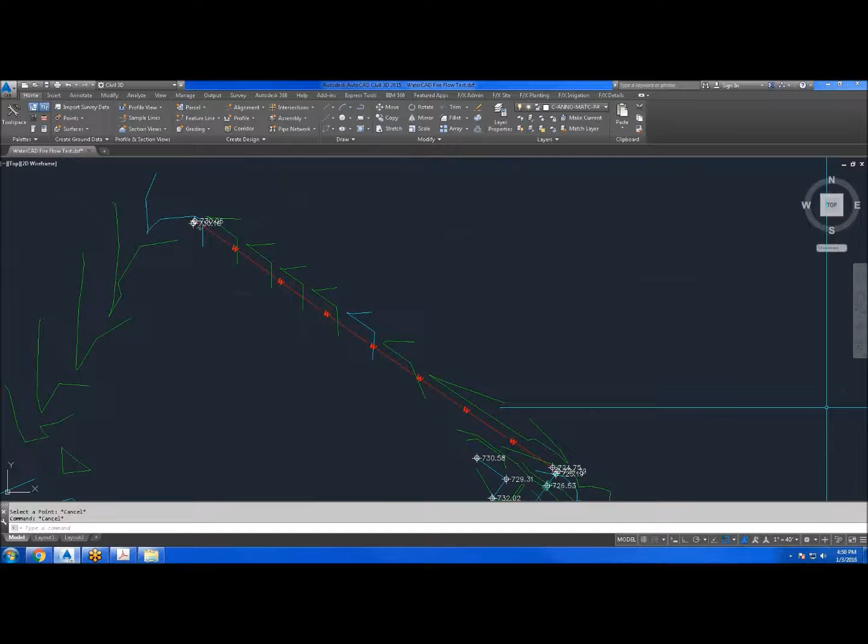Hey everyone, so today we're going to be performing a fire flow test by making a model in WaterCAD.

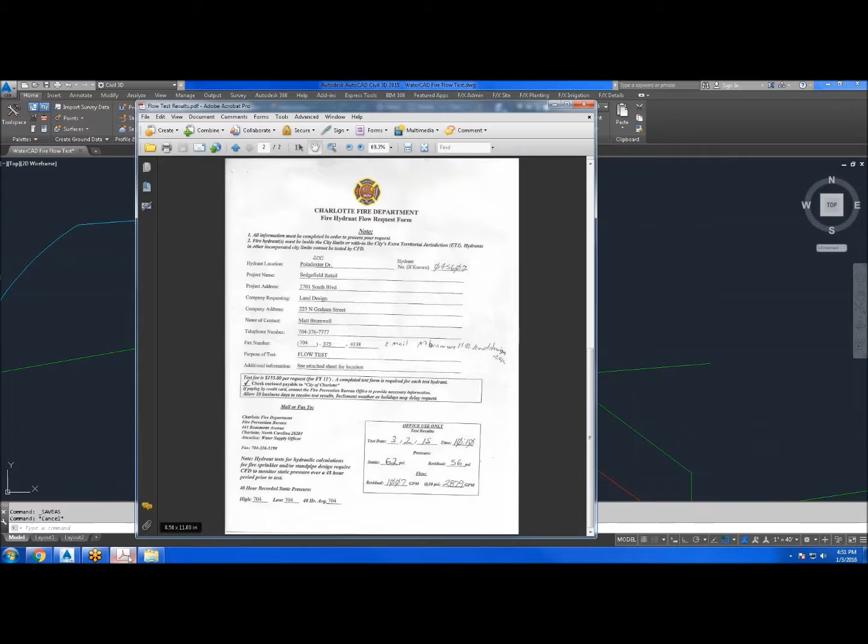So first things first, we have a site here that has a Harris Teeter right in this space. And then we also have a fire hydrant located right here where a flow test was performed, which we have the form pulled up right here. And then we have an existing 6-inch CIP line going into our site with an 8-inch PVC fire line. And this is a backflow preventer, which we'll touch on once we get into WaterCAD about how to model that properly.

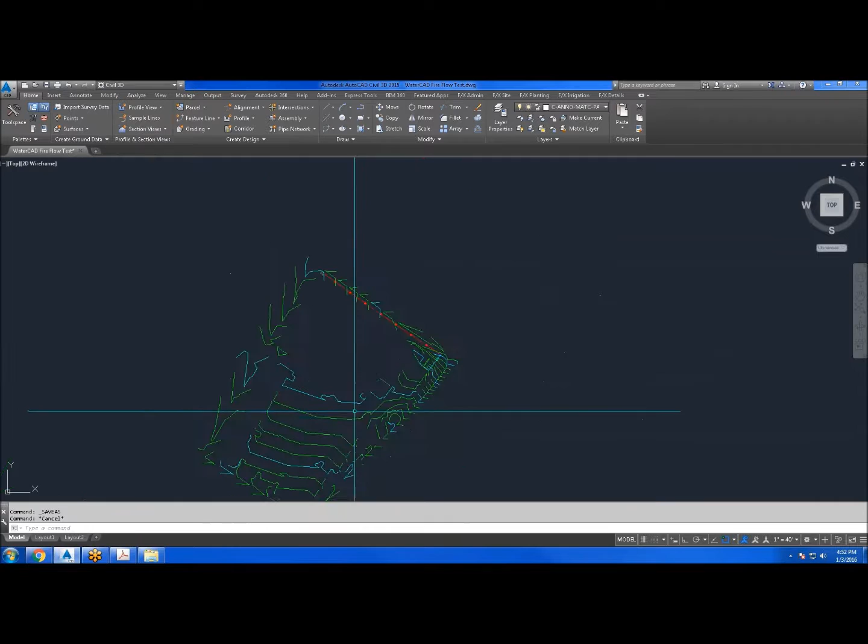So you want to bring in a couple of things to kind of clean it up before you import this into WaterCAD. So what I've narrowed down is the finished grade contours, the fire line with the fittings, the backflow location, your fire hydrant, and your existing water line.

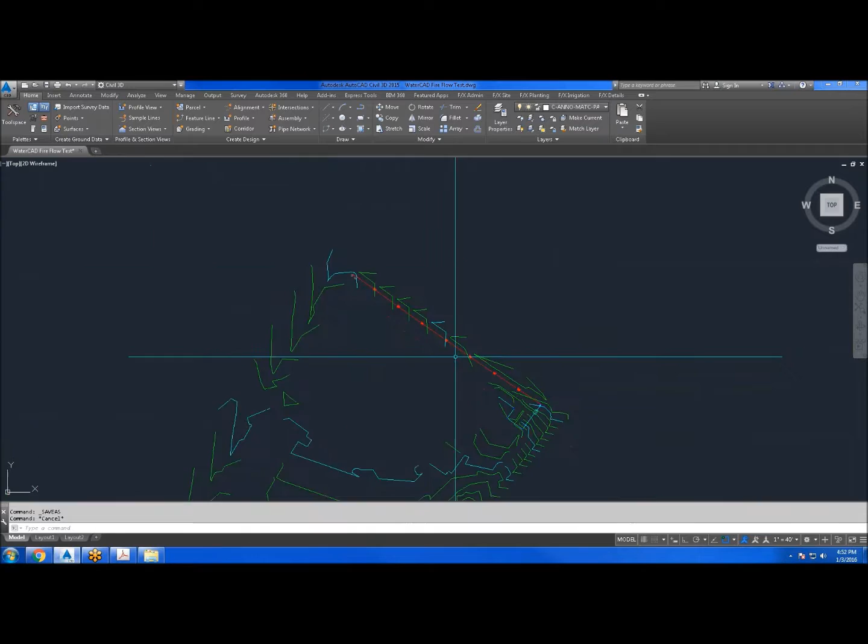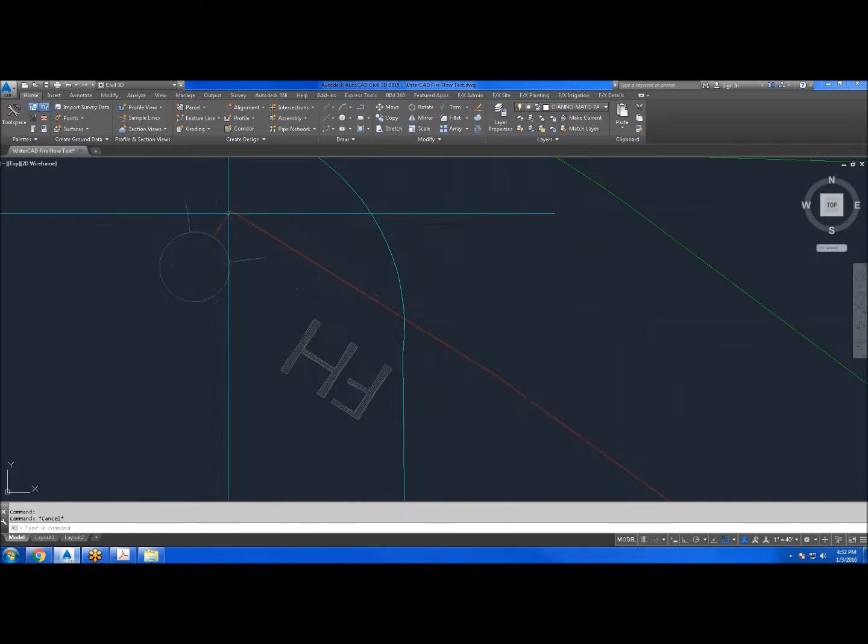First things first, we're going to use the break command to break up our polylines where there's a fitting. So type in break, click the polyline, type F for first point. We're going to click this twice, 1, 2, and now we're good. You'll notice how we're broken up at that T since this existing water line keeps going past this fire hydrant. But we just want to simplify it for our own benefit once we bring this into WaterCAD, to have the least amount of clutter in our WaterCAD file.

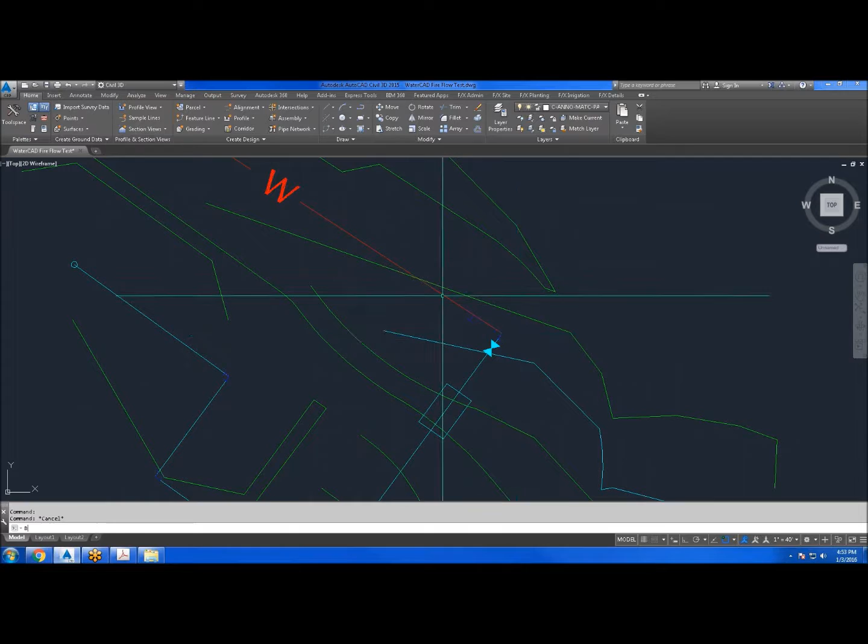So now we're going to go ahead and do this for all of our other fitting locations. So break again, first point, and just click twice. You'll notice how we're broken up. So keep doing that for all the other ones. Okay, one more.

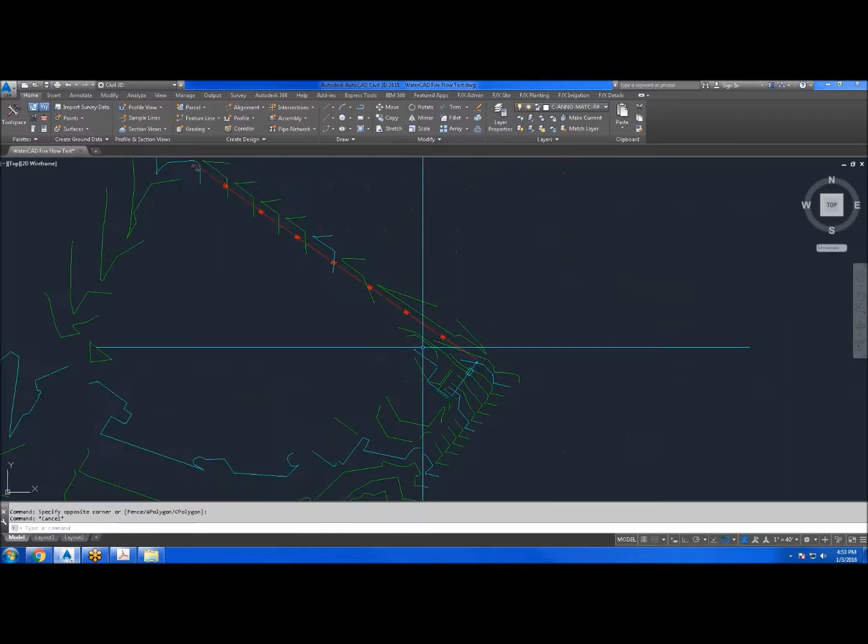Alright, so now we're all broken up, but we need to make a surface real quick so we can add elevations, since WaterCAD needs elevations to use in the model when running the fire flow test.

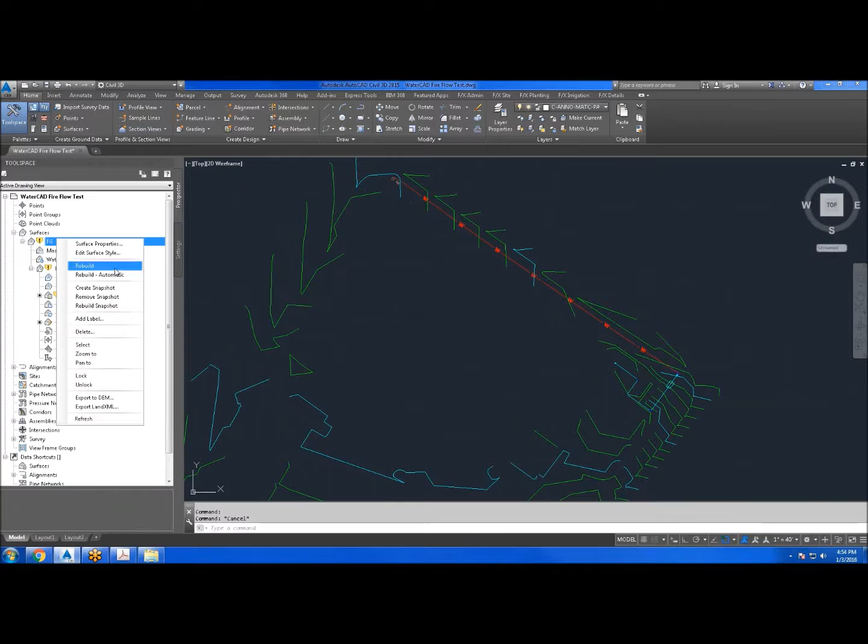So I actually already have a surface set up and all my contours are already in there, so let's just rebuild this. Now we're going to select the surface, add labels, spot elevations, and we're going to put it at the fire hydrant where the flow test was performed and at each of the fittings.

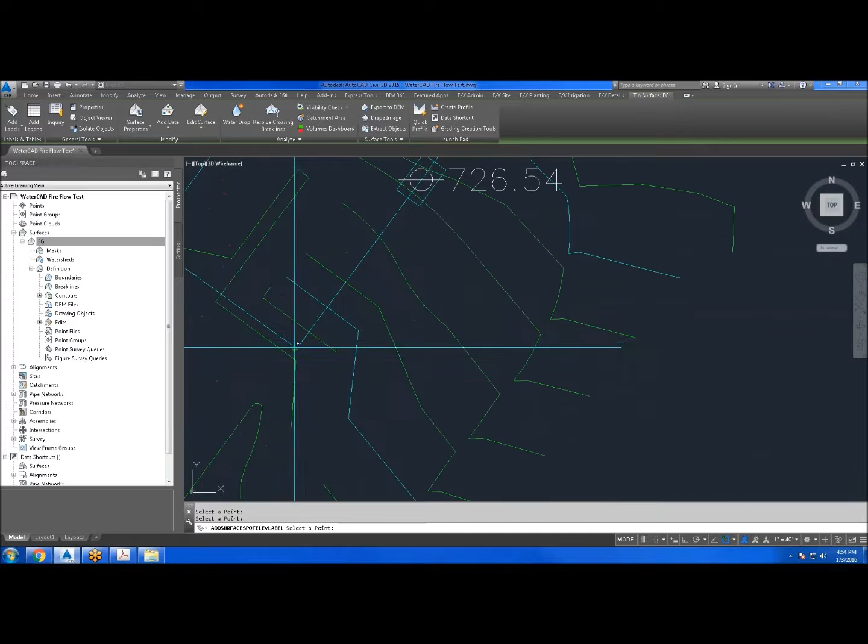Okay, so now that that's over, go ahead and save your DWG, and now we're going to save this out as a DXF, which is the file type that WaterCAD uses so we can actually import a DWG, or just an AutoCAD file - I guess it's a DXF in this case. So we have to save it out as a 2004 DXF since that's all that WaterCAD can really handle. So go ahead and save that out.

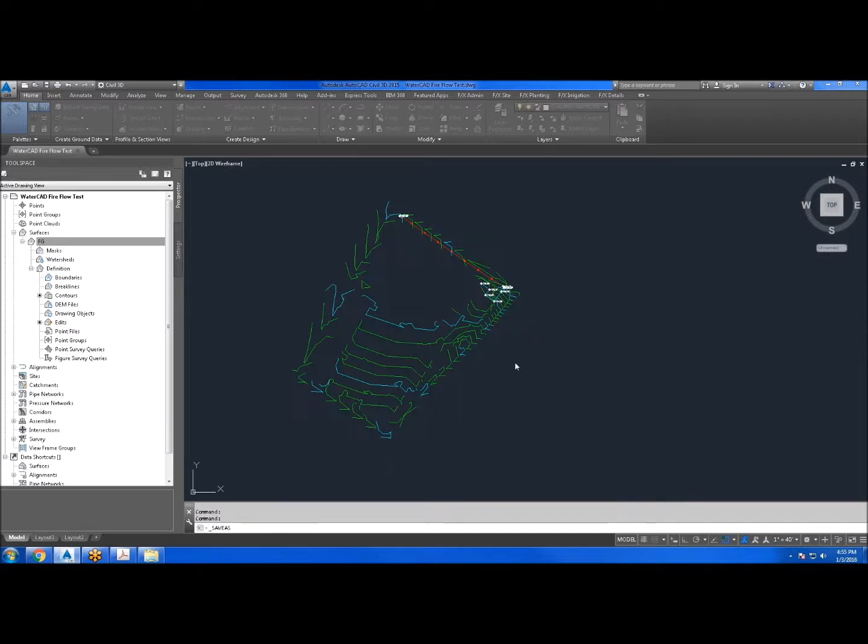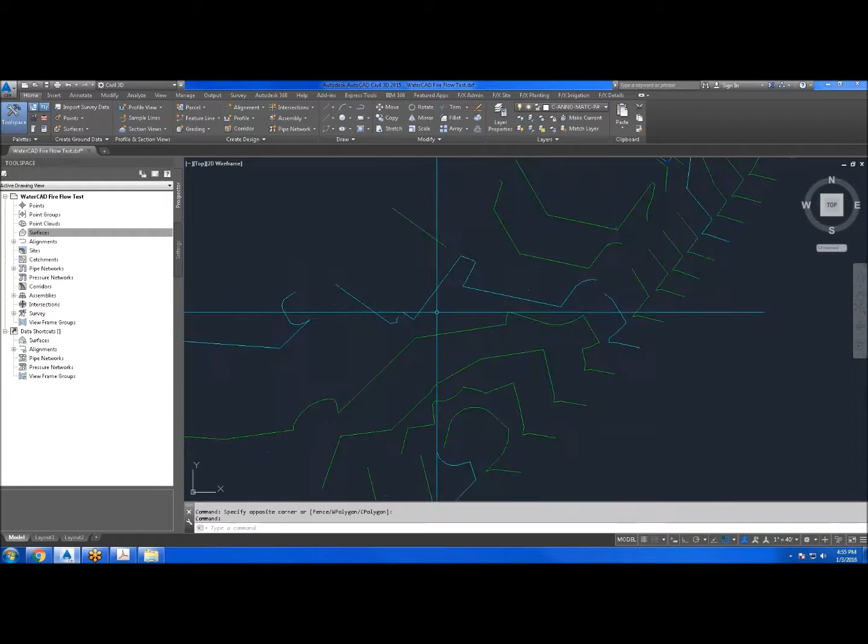So now that we have our file in a DXF format, we kind of need to clean this up. So let's go ahead and delete the surface out. And we're going to just select similar to delete all these contours. And we're going to go ahead and delete our fittings.

And note that we're going to be bringing up the DWG for reference when we're putting in our elevations into WaterCAD.

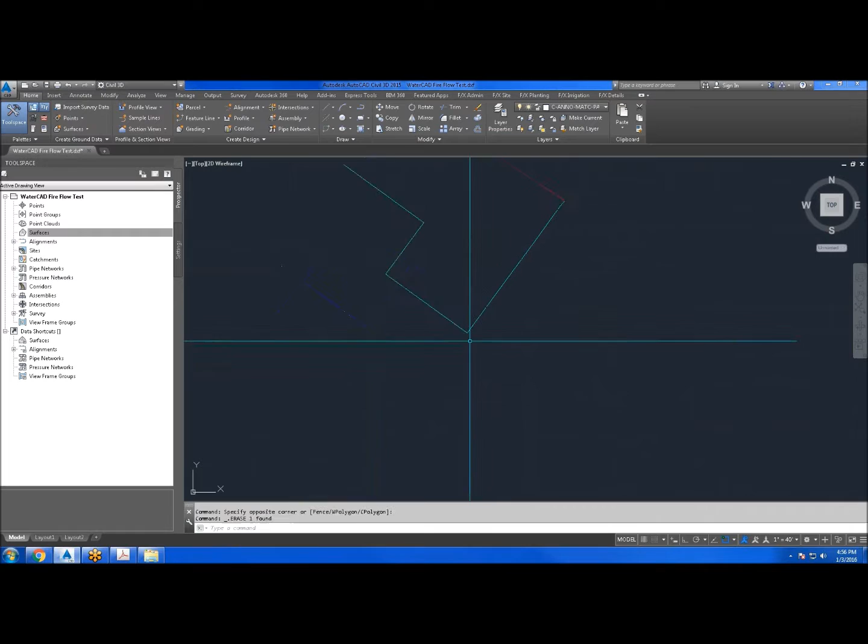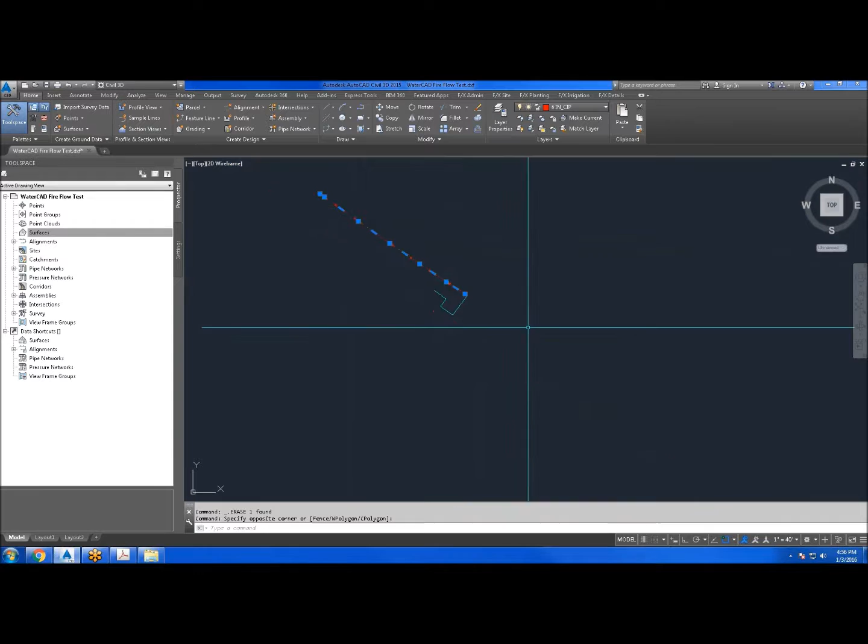So now this is going to look a lot better when we bring this into WaterCAD. Also note, I've changed the layer names to reflect what they actually are, since WaterCAD will be reading what the layer names are, and so it'll be adding labels. So just to make them a little nicer, I just went ahead and named them to actually what they are, followed by the material. So since this is an existing 6-inch CIP, I just reflected that in the layer name, and I did the same thing for the PVC, or for the fire line in our site, 8-inch PVC.

So go ahead and save that, and we'll be bringing this into WaterCAD now. So after opening up WaterCAD, we're just going to create a new project.

And once this is loaded, now we're going to import our DXF that we saved out from the DWG in AutoCAD. So to do this, you're going to go to Tools, User Data Extensions. You're going to right click on Pipe, Add Field, and then just name this AutoCAD layer. Leave everything else default and hit OK.

So then go back to Tools and go to Model Builder, and now we're going to make a new model builder. For your data source, select CAD files, and then just browse the DXF that you created. Hit open. And notice how these are the layer names that WaterCAD drew from AutoCAD, so these will actually be the labels that generate for our pipes.

So moving on, right here, we're going to select establish connectivity. This is just in case, for whatever reason, if your polylines weren't snapped properly, they'll all be connected. Leave that. This is okay right here too.

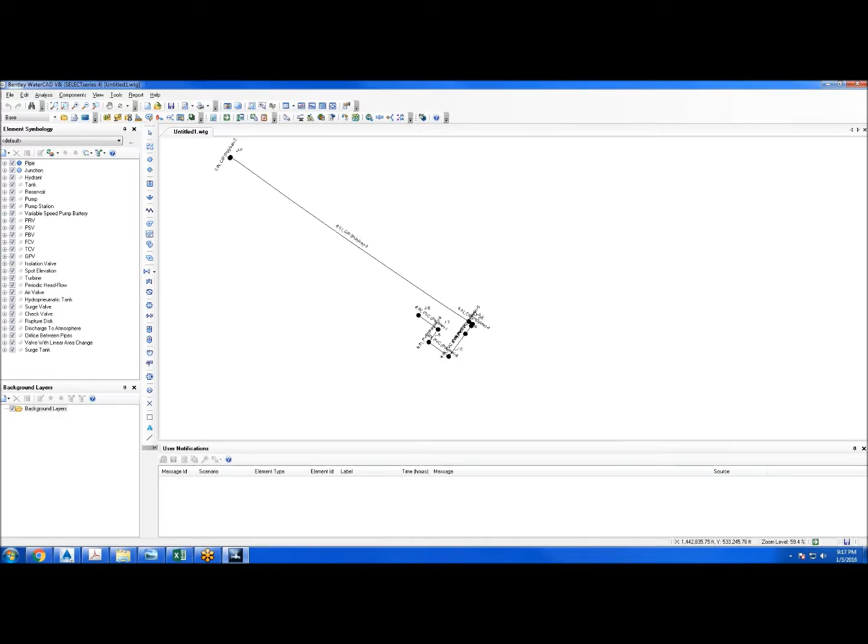Notice how now our model has been brought in. I'm going to go ahead and clean this up a little bit so it's easier to read when we start putting in minor loss coefficients and other things. To do this, you can just double click on the label, and I'm going to get rid of this polyline. There's probably a way to do this a little faster, but I'm just going to take some time to clean this up real quick.

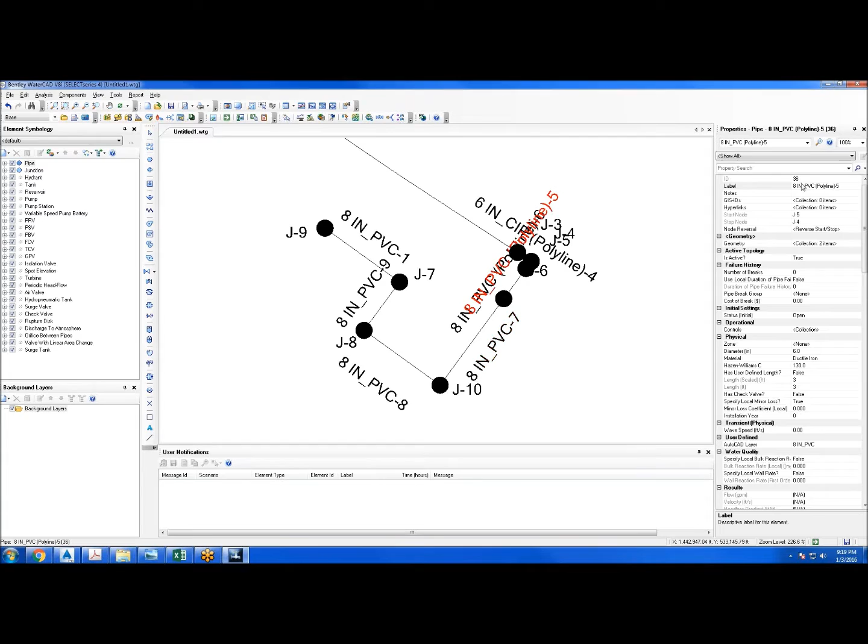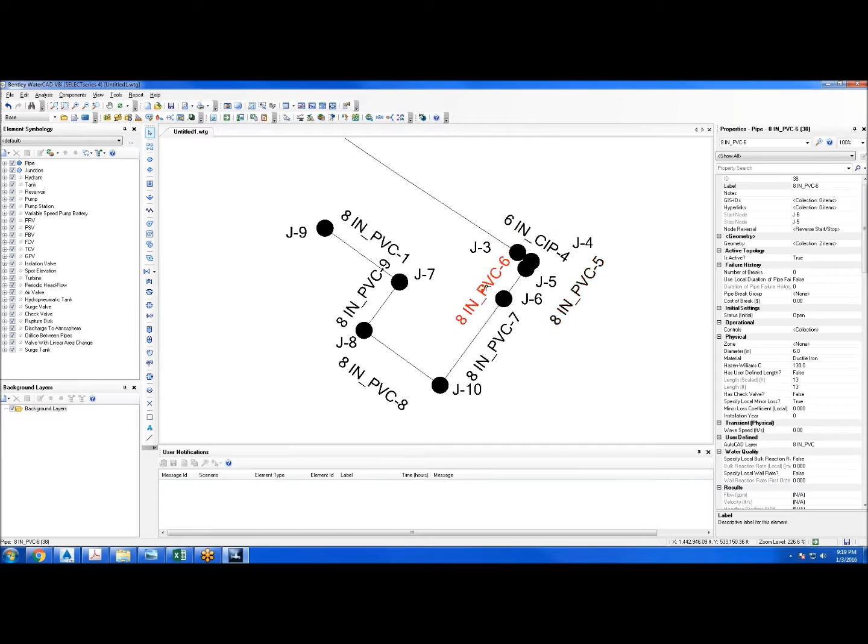It's kind of annoying. Alright, so that's cleaned up a little bit now.

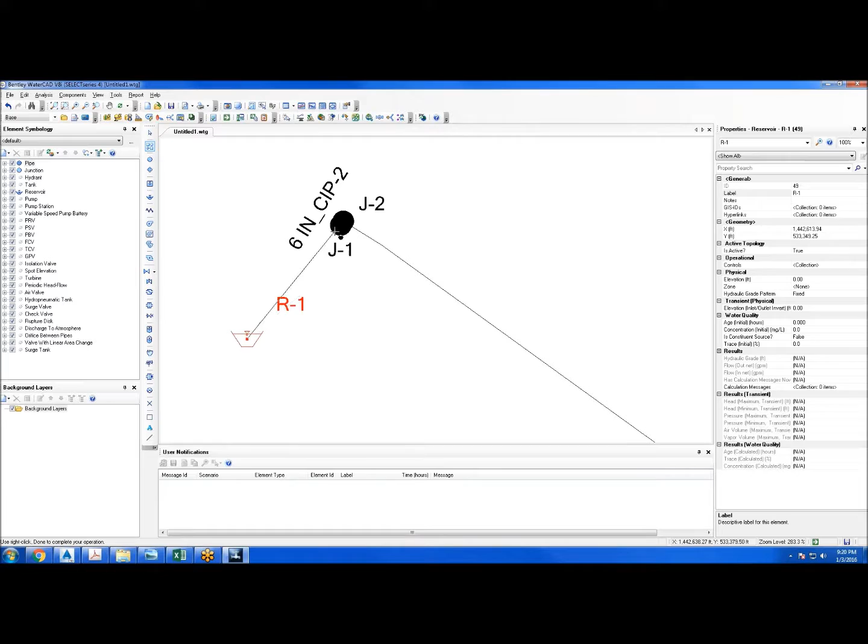So now for this is our fire hydrant that we had that flow test from. What we're going to do is add a reservoir, and then add a junction from this reservoir to the existing fire hydrant. Then we're going to add a pump between the reservoir and the fire hydrant. So click on this pump icon and drop it anywhere in between and hit yes.

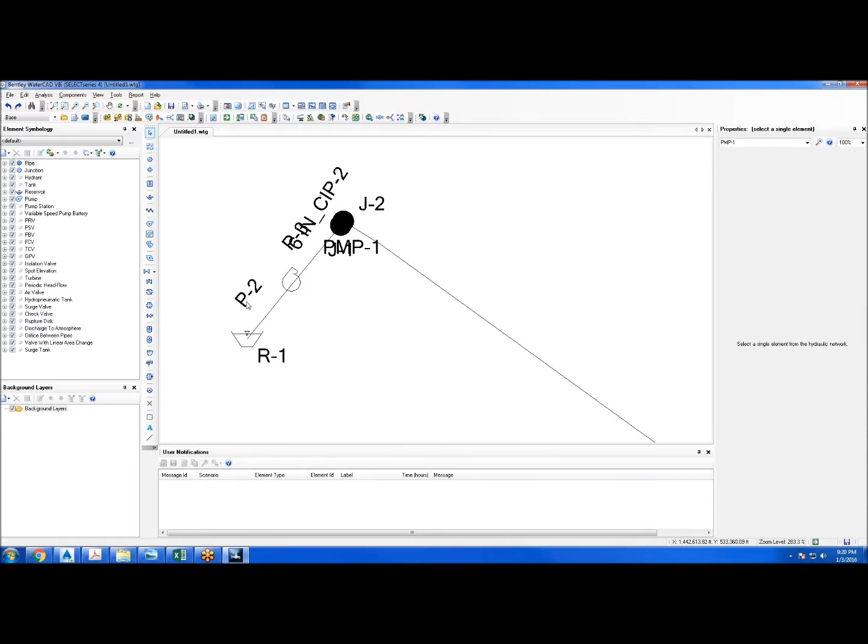So then I'm going to clean this up a little bit. Okay, now we're going to add elevations, and you want your reservoir, your pump, and this fire hydrant to be the same elevation. So now you're going to pull up your DWG that you saved out.

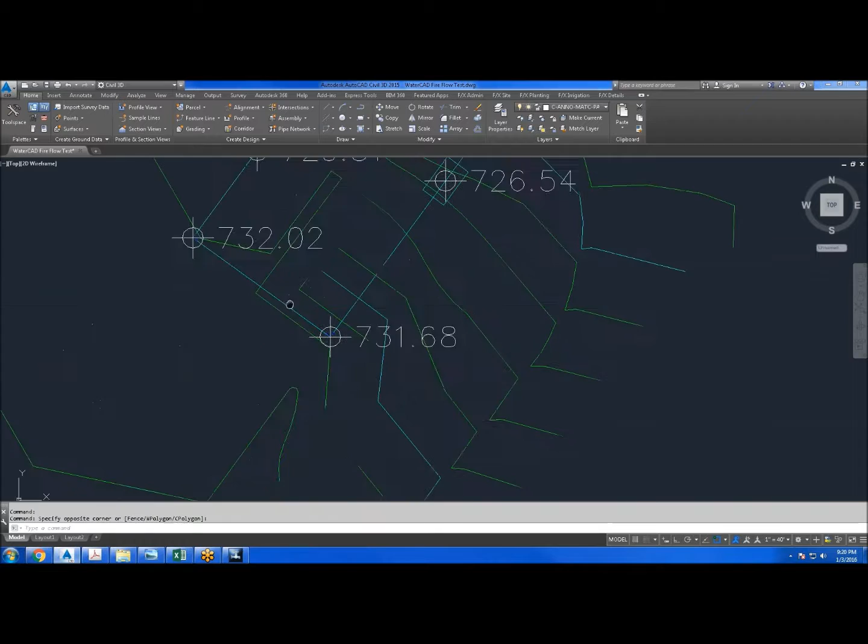This should have all your elevations if you kept this. So we're just going to put all these elevations into WaterCAD. I'm going to move this to my other screen and look off it and put in all these elevations at each of these junctions. To do this, all you have to do is click on each one, and this is a little tedious, but you just have to throw in your elevations one by one.

Notice the pump, reservoir, and fire hydrant are all going to have the same elevation.

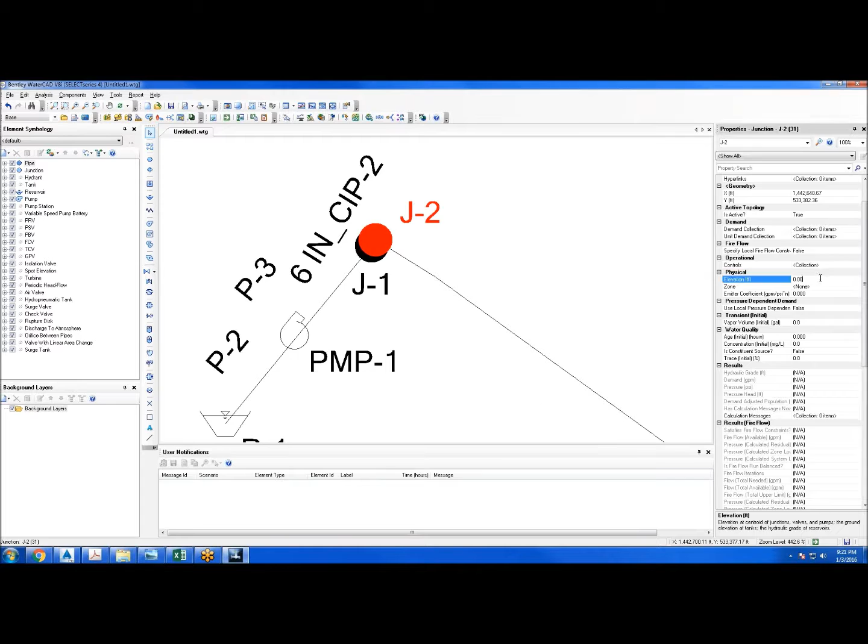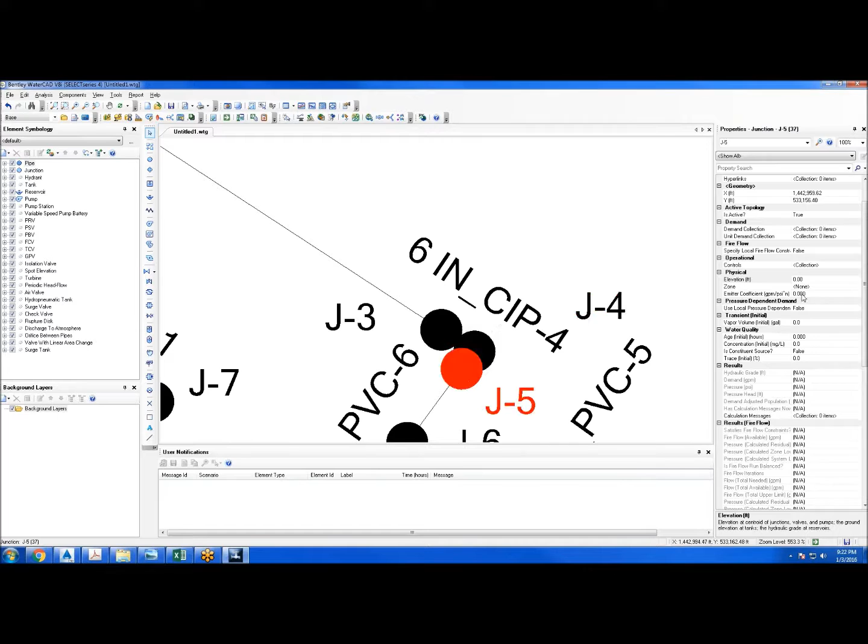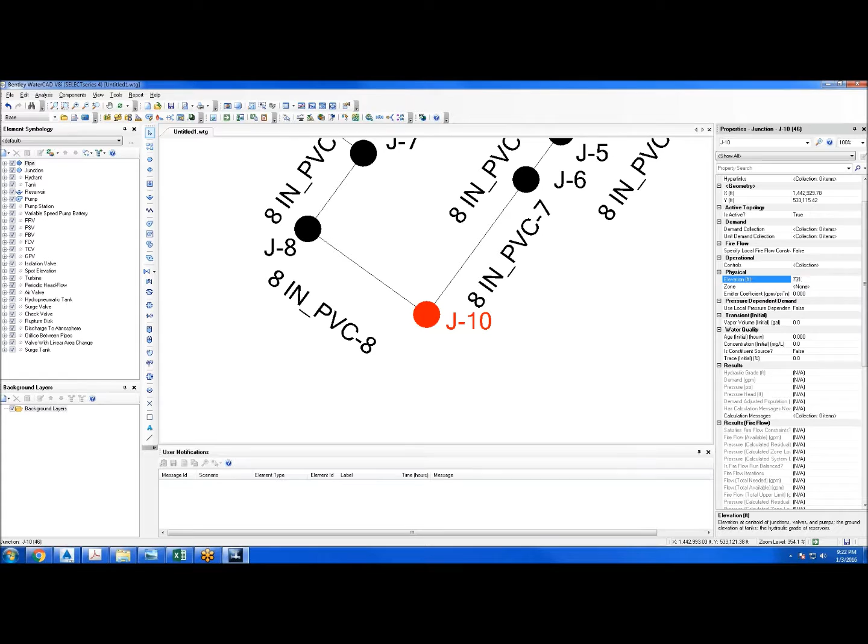Yeah, this is kind of painful, but almost there. Alright, so you just have to double check that you have an elevation assigned to every junction, because if not, you're going to get an error when you run the program. So it's just something to keep in mind.

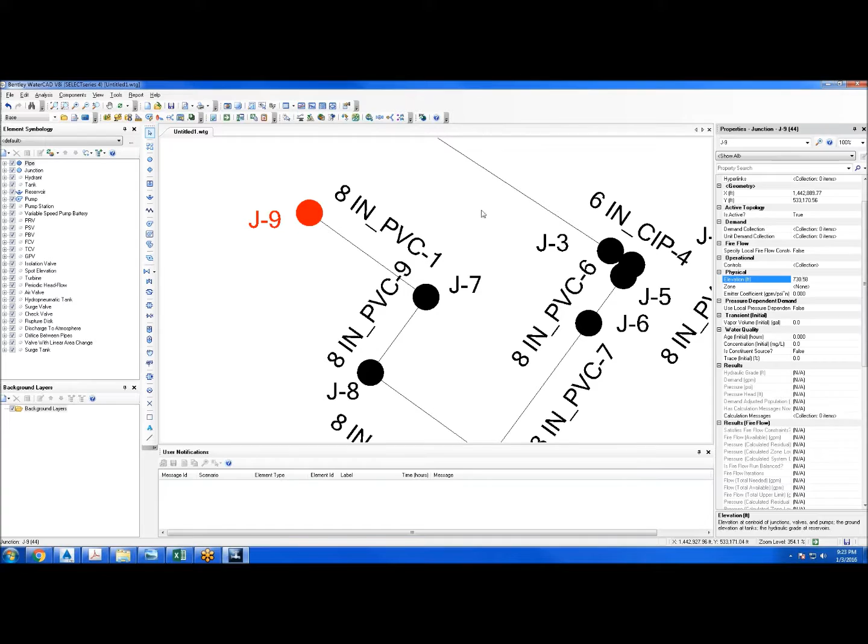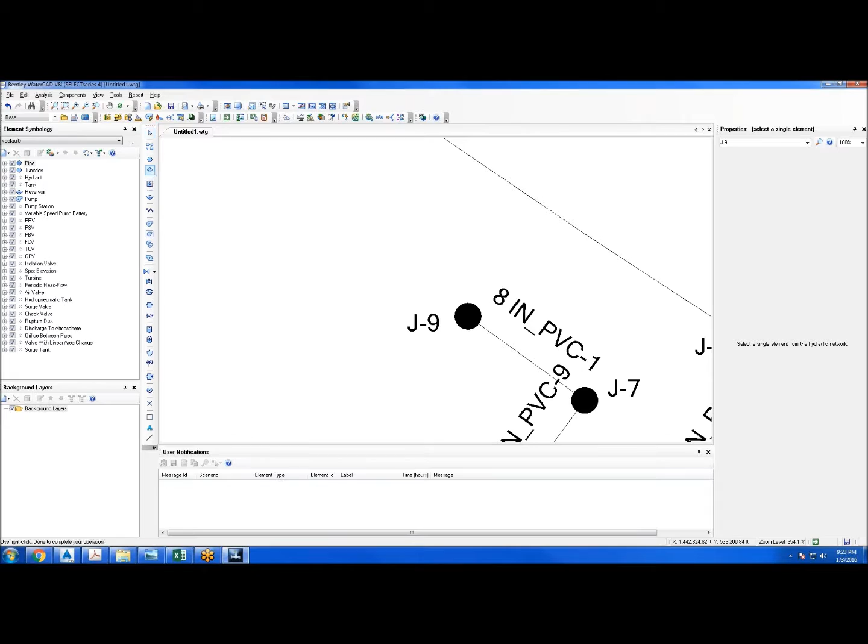Alright, so this is the line going to the Harris Teeter. So to mimic this fire hydrant flow, we're going to convert this junction into a fire hydrant just for the sake of the model. To do this, just click on this hydrant icon and click on junction 9, which is the service to the building. This is just going to allow us to put in a fire flow demand, which for our case, for the Harris Teeter, it's 650 GPMs.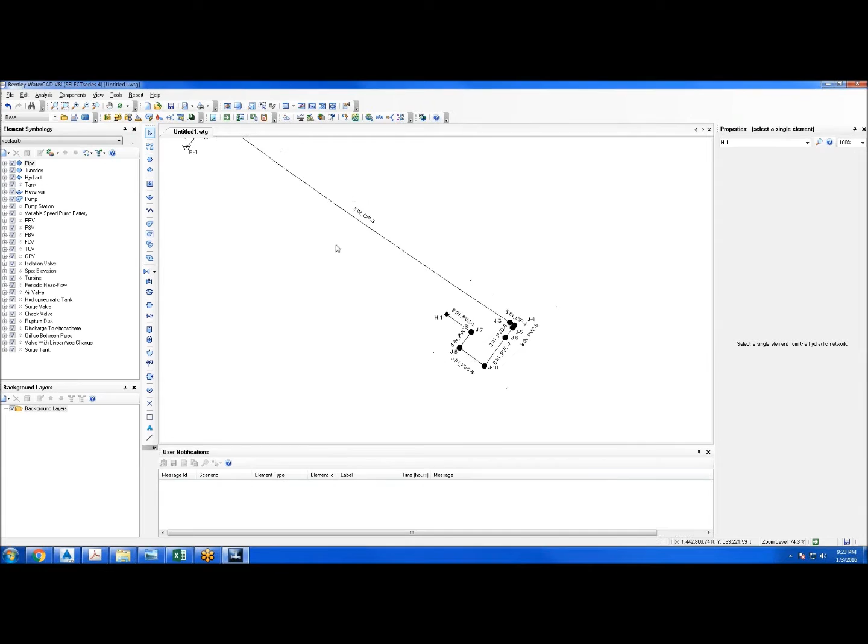Once we have all that set up, we need to go to Analysis, Calculation Options, and make sure you're under Steady State. Now we're going to change this calculation type from Hydraulics Only to Fire Flow. And close out of that.

So from there, we're going to set our fire flow tests, and that is within calculation options. Nope, it's in fire flow down here, base fire flow. So over here, it might vary from project to project, but for the sake of this video, we're just going to put 20. Fire flow needed, so this is our demand, so we're going to put 650. We'll leave that at 3,500.

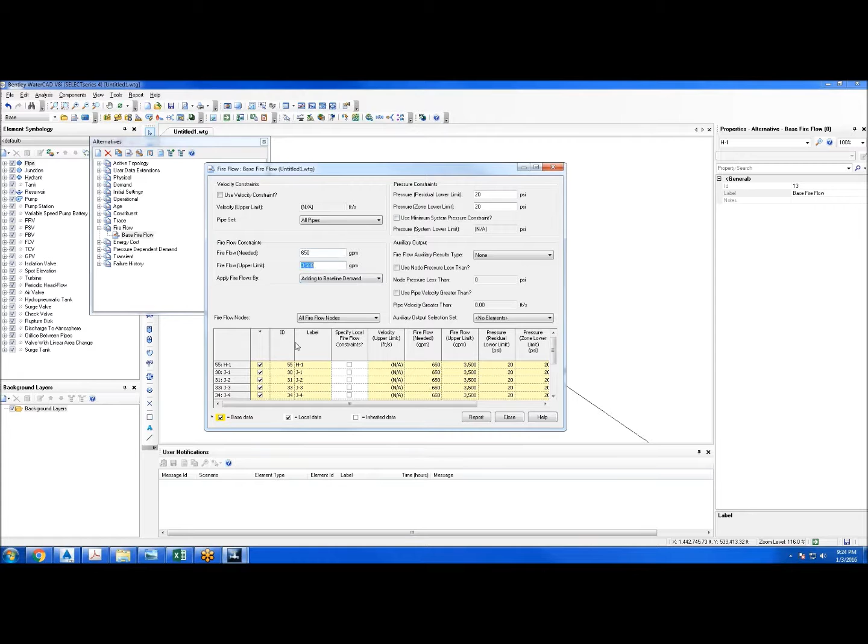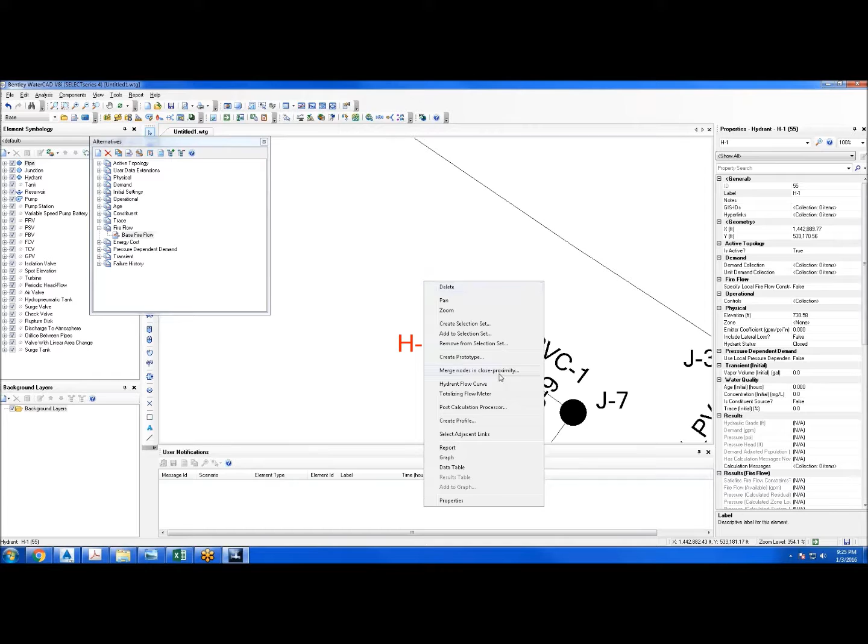So we'll close that for now, and I'm going to create a selection set. This is very useful for, like, if you have a single family and you have a bunch of fire hydrants or multiple fire hydrants on the project, but in this case we only have one. You just click on your fire hydrant and right click and go to create selection set. So I'm just going to call this Harris Teeter.

So we're going to go back to that Fire Flow tab, base Fire Flow. And so the Fire Flow nodes, now we're going to just select that selection set that we created. So now we have that set up. Just hit close. So now this thing is ready to be run as a Fire Flow test.

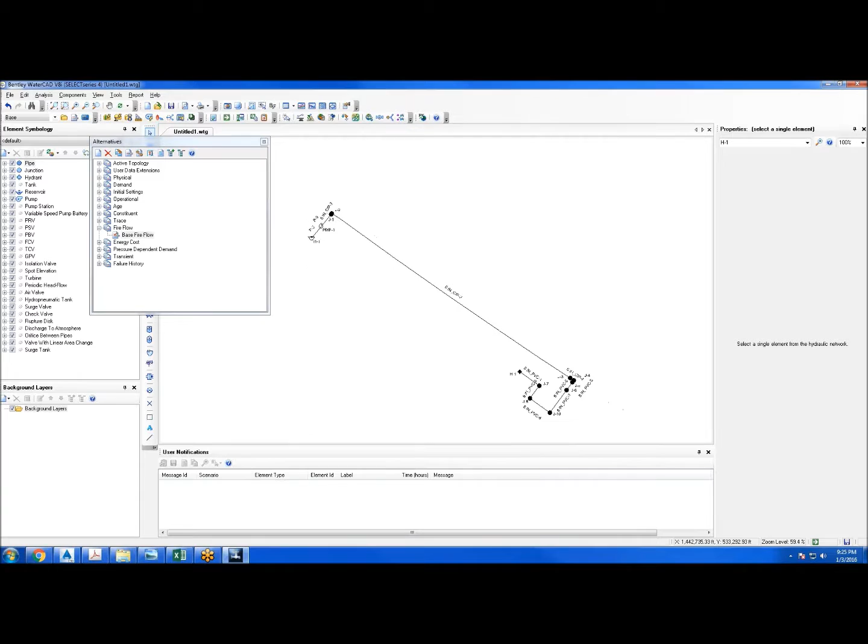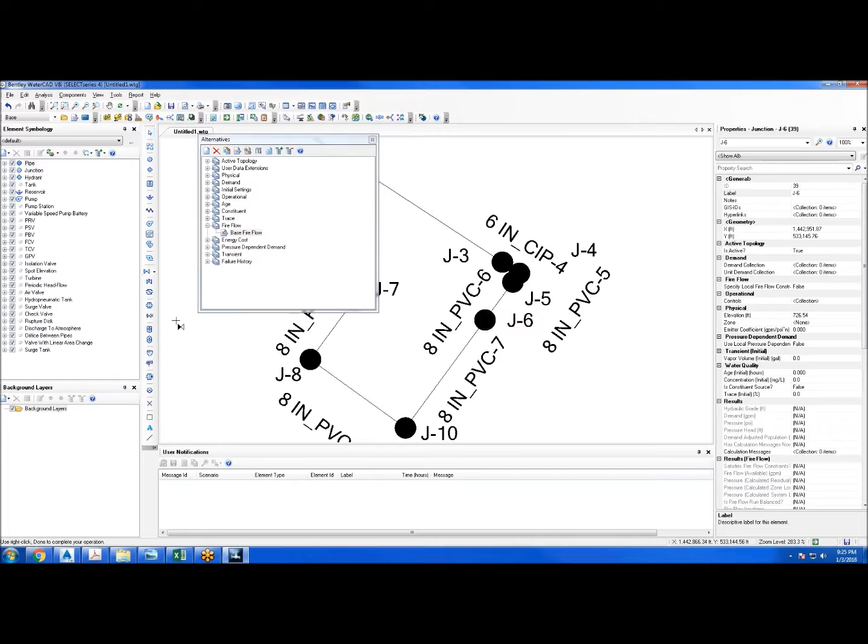But we need to change the material for these pipes and change the diameters. Also we need to look at this backflow prevention location. So this junction 6 is where the backflow preventer is located, and so we're going to use this GPV to model the backflow, the head loss that will be resulted from that backflow.

So we're gonna morph it, and this is actually an 8-inch line, so we're just gonna go ahead and change this diameter to 8. And it kept the elevation.

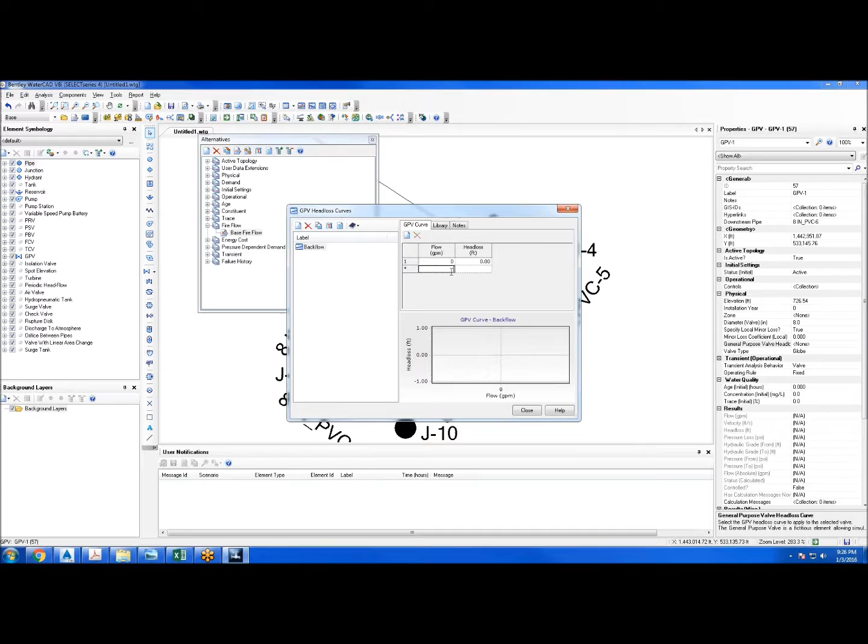So now we need to do a head loss curve. So we're going to do edit GPV head loss curves, set a new one. I'm just going to rename this backflow. So we're going to need 2 rows. I'm just going to put 3500 right here.

And the reason why I'm doing this is so the system, if the flow varies when the model is being generated, it kind of just produces a big window. So now we're going to go into this spreadsheet that's set up, and it's included in a tutorial file. Here we have our flow rate demand, and you can look at specs for these backflow preventers.

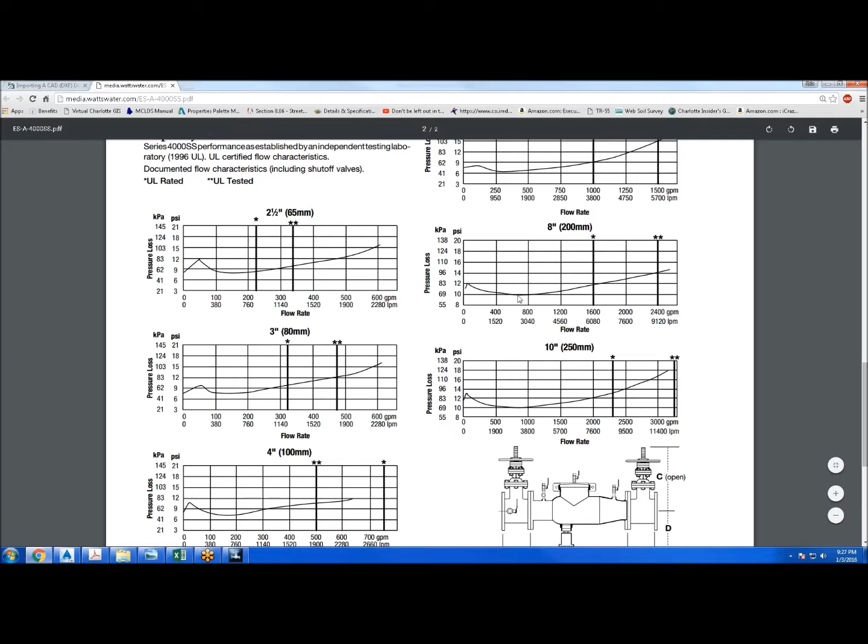So in our case it's 8-inch, and since our demand is 650, if you just follow this curve, it's basically 10 psi as a pressure loss. So what we're going to do is just put in 10, which it's already in, and so it produces a head loss amount right here, which is 23.07. So now we're going to put in 23.07 for both.

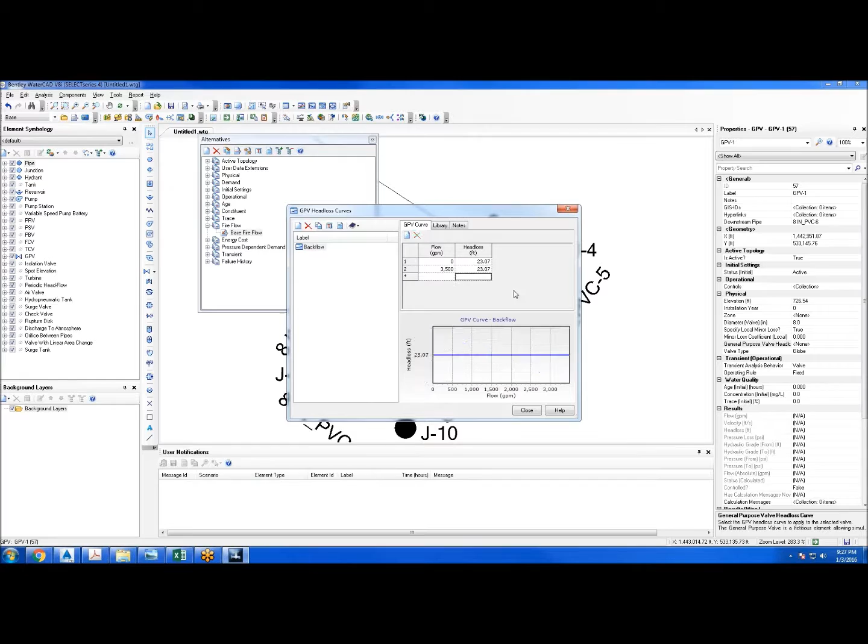So it's just a constant head loss no matter what the flow is going into that backflow. After you do that, you're going to select that curve that we just made in this valve head loss curve.

I'm going to go ahead and save since I haven't done that yet. Let's put in DWGs for now. Alright, so now we're saved.

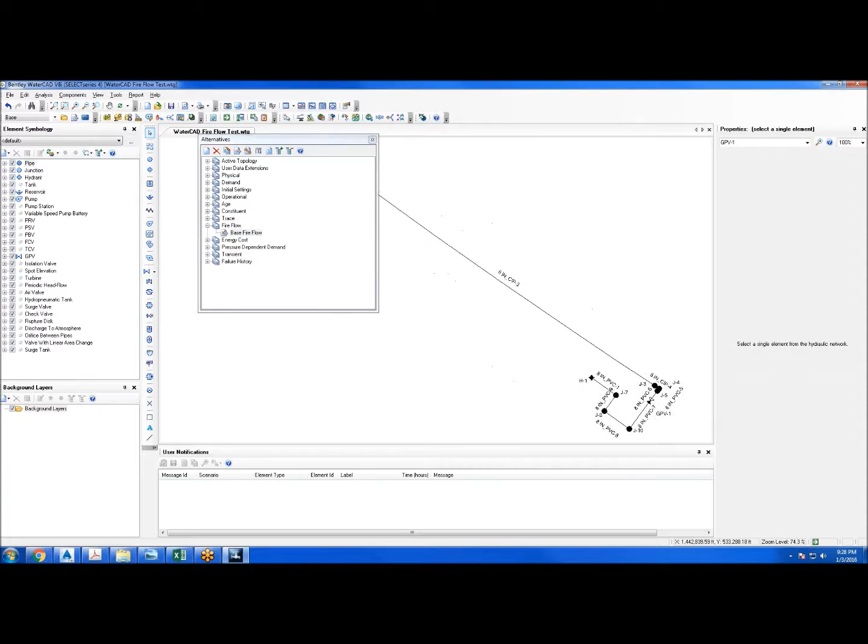So now we need to look at this pump right here, and this is going to apply to the other tab. This is where we need to pull up the Fireflow or the flow request form, and we're going to put in each respective quantity, and it's going to spit out.

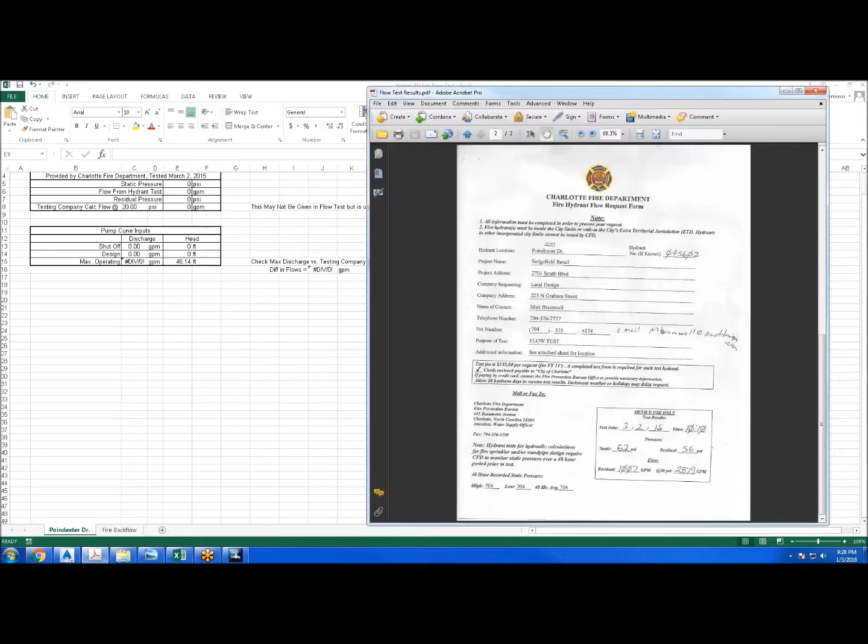So for instance, I'll just set all these to 0. Just looking at the form that we got back, we're just going to put in each of these numbers.

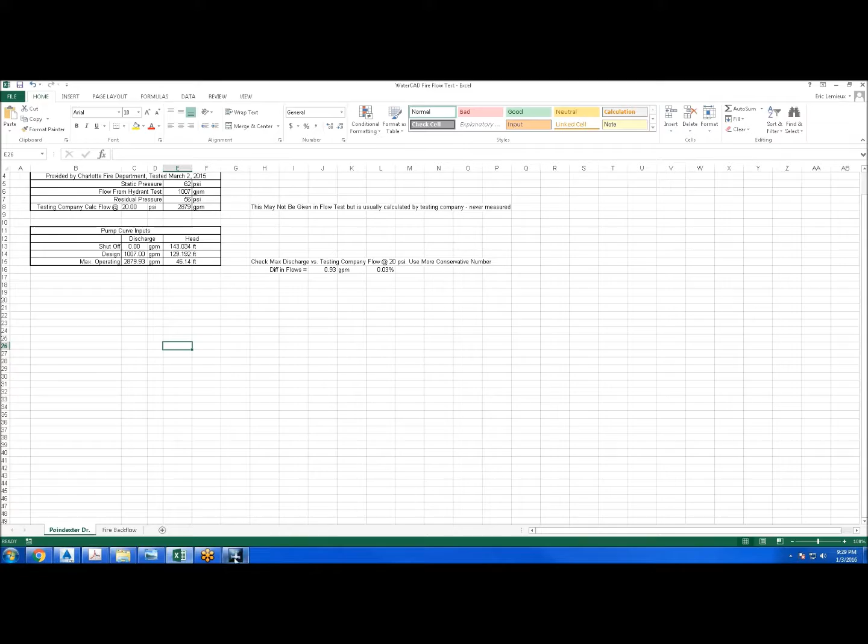So notice how now we have some pump curve inputs to put into WaterCAD. So now let's pull this up. We're going to do kind of the same thing we did for the backflow. We are going to go to pump definition.

Edit pump definition, and now we're going to make a new one. I'm just going to call this Poindexter fire hydrant.

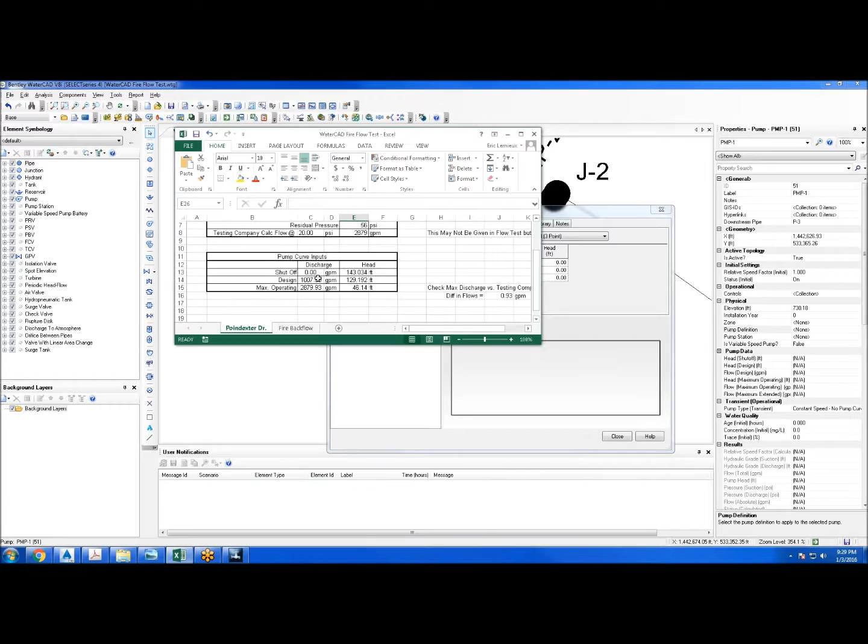So now I'm going to drag this to the other side of the screen, but you're just going to put in these inputs now into each respective quantity. So shut off 0, 1, 0, 0, 7, 2, 8, 7, 9.93.

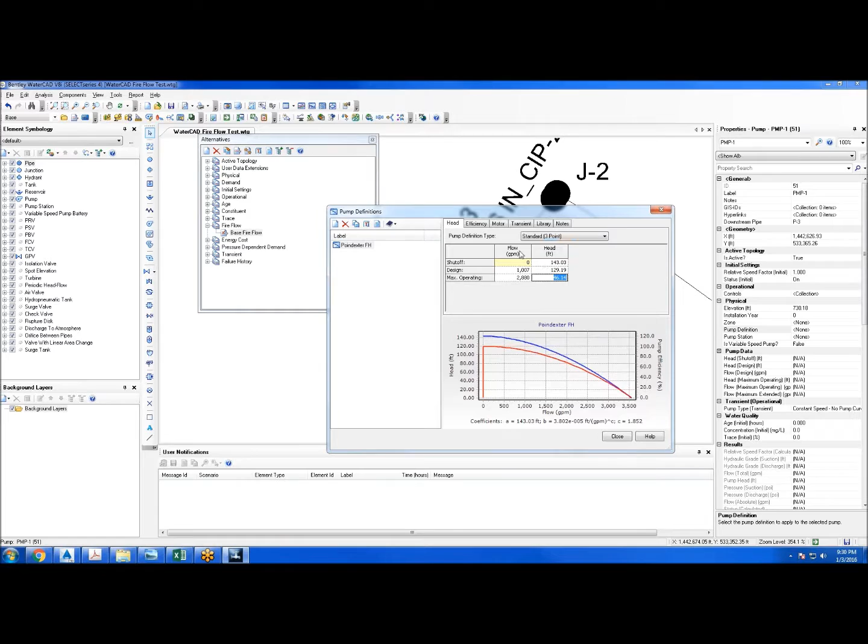Okay, so you want to make sure your definition type's a 3-point curve. So once we have that set up, we're going to hit close, and we're going to select the pump definition that we just created.

So after we have that set up, let's just kind of see where we're at. We'll go ahead and save one more time. We're going to see if this thing even runs, which WaterCAD's known to spit out a lot of errors from time to time, so it's pretty frustrating.

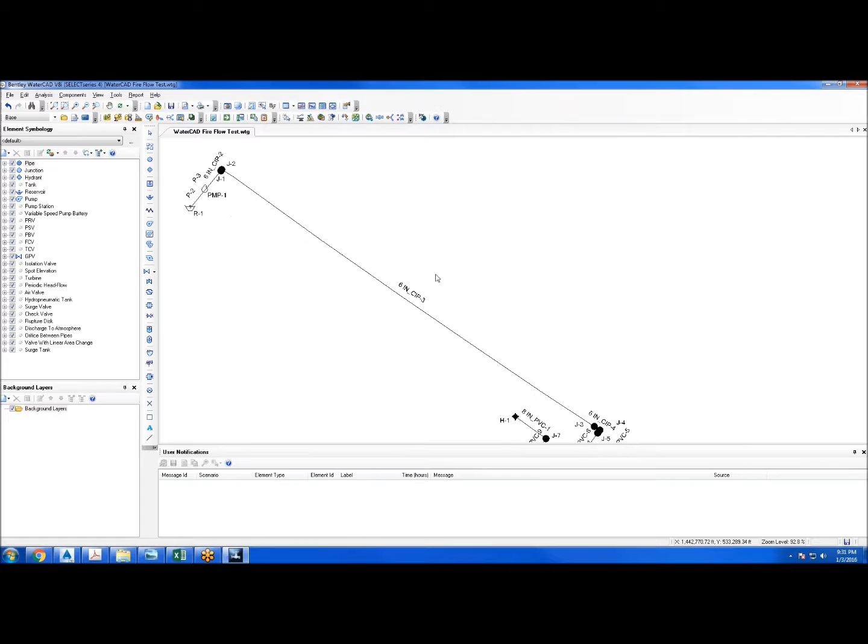So it looks like everything ran pretty well for the first time, but now we need to edit the pipe material and pipe diameters for each respective part of our system. We also need to apply minor loss coefficients. So, to do that, we're going to go to analysis.

Oh, I'm sorry, no, we're going to go to view, and I think it's flex tables. Yep, double click on pipe table. So what's nice is if you set up your layers properly in AutoCAD, this will kind of make things go by pretty quickly. So we're just going to quickly edit all this according to what our system is by just looking at the labels.

Then we have PVC. Kind of tedious, probably a better way or a faster way, but keep going.

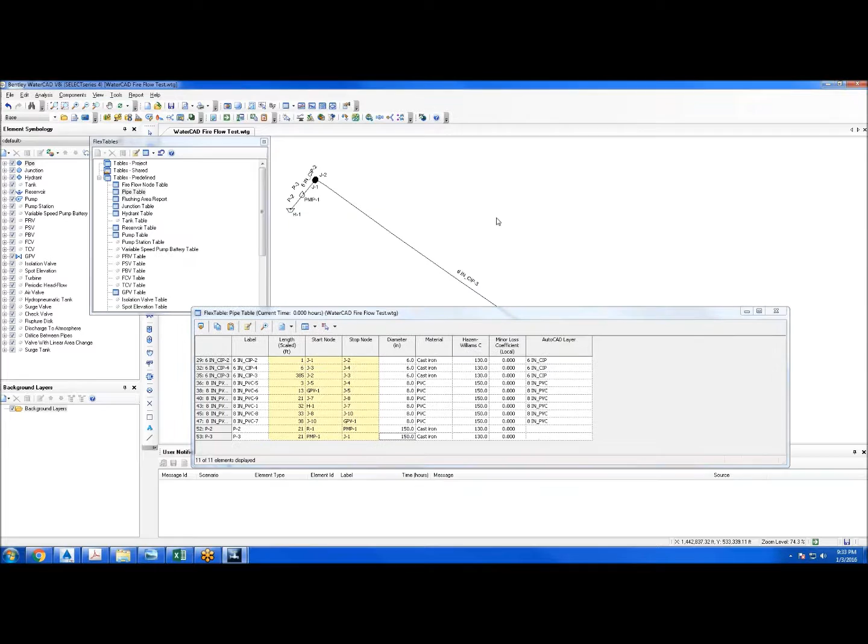So after we have that, now we need to apply our minor loss coefficients. So here we have a T because the system keeps going, so this is going to be a branch. So that's going to be CIP3.

So this is also kind of tedious, but it's the general idea. And this is also going through a T, so this is going to be a line. And then PVC5 is a T for a branch.

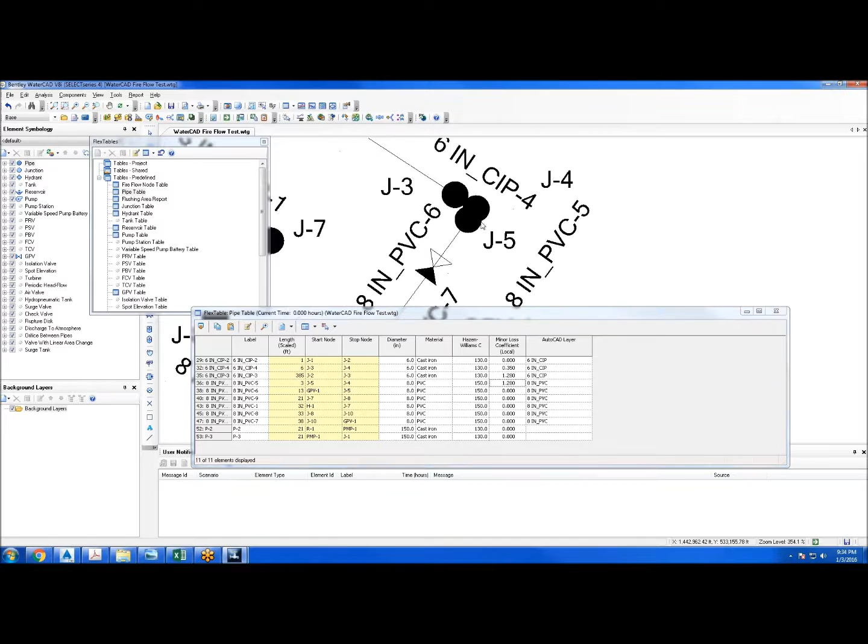Let's see, I think we have a gate valve here. So that's going to be PVC5. Excuse me, it's going to be PVC6.

I'm going to treat this as an open gate valve. So this backflow, the head loss was already calculated in the junction, so I'm just going to skip this pipe since it's already being considered in the calculation. So now I'm just going to move on to 8.

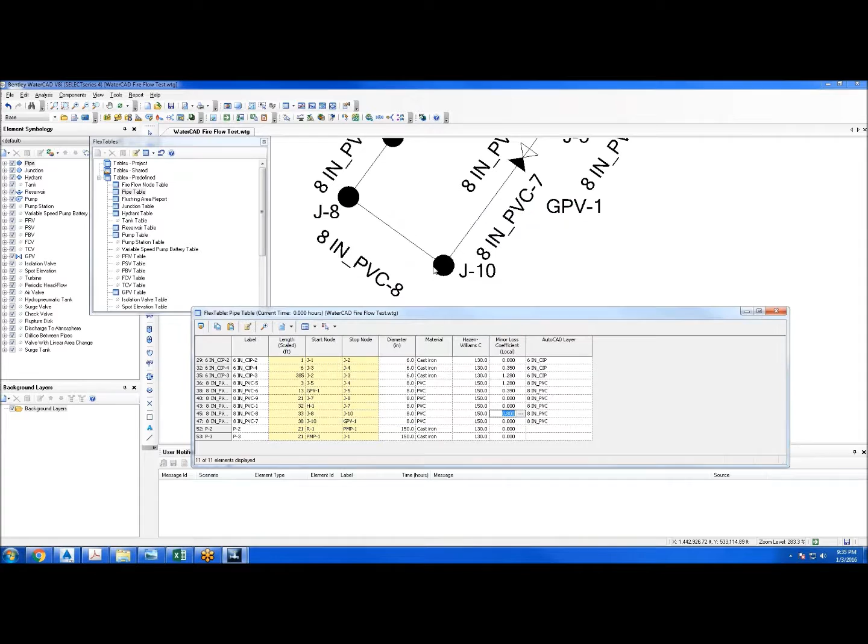So 9 is also going to be a 90 degree. As is PVC1.

Alright, so now we should be good to go. So go ahead and close it out, save it, and let's run this thing.

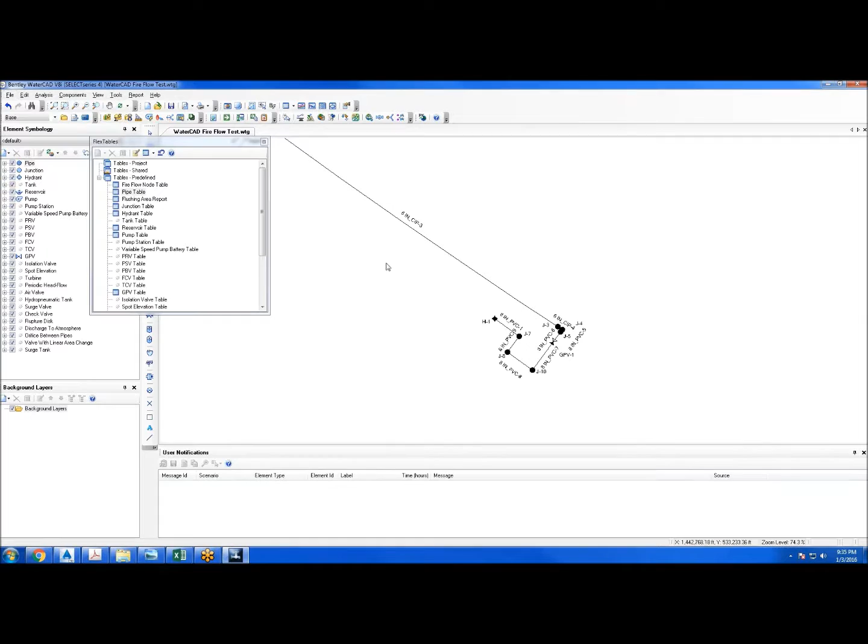So now you have something to work with. Alright, close, go to report. Oh wait, actually click on this drop down, you can just hit fire flow report.

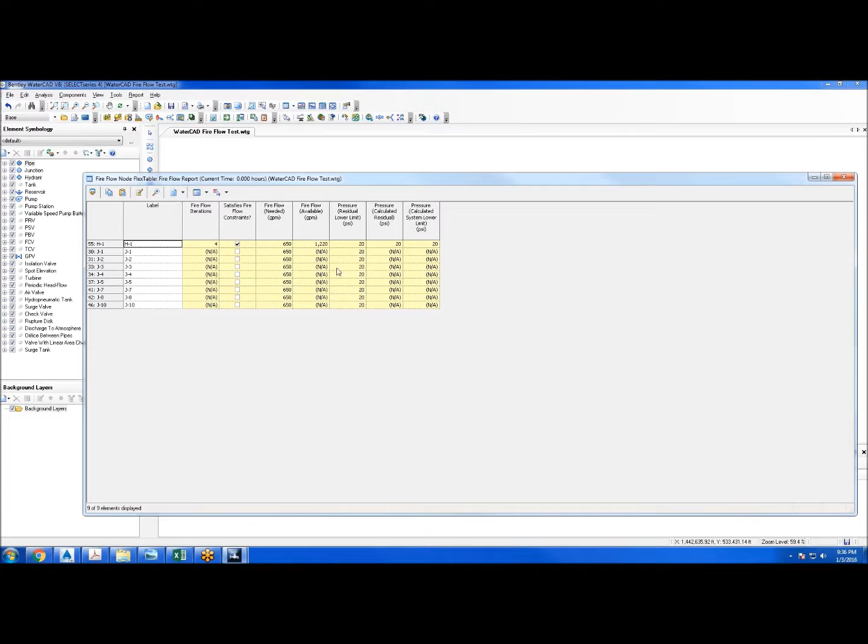And notice how our fire flow that was needed, or for the test, the fire flow was providing much more than the minimum. And you can also go to hydrant and pull up some additional information.

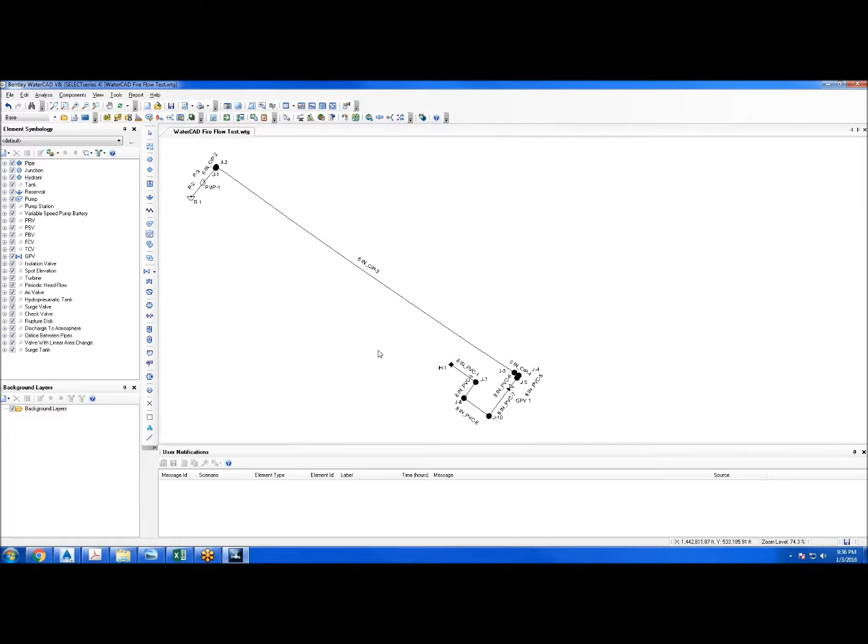So I hope this helps. It at least kind of gives you a general starting point about how WaterCAD works. If there is anything wrong with this model, feel free to let me know, but this is at least a pretty good intro to kind of how WaterCAD works. So I hope this helps, and thanks.